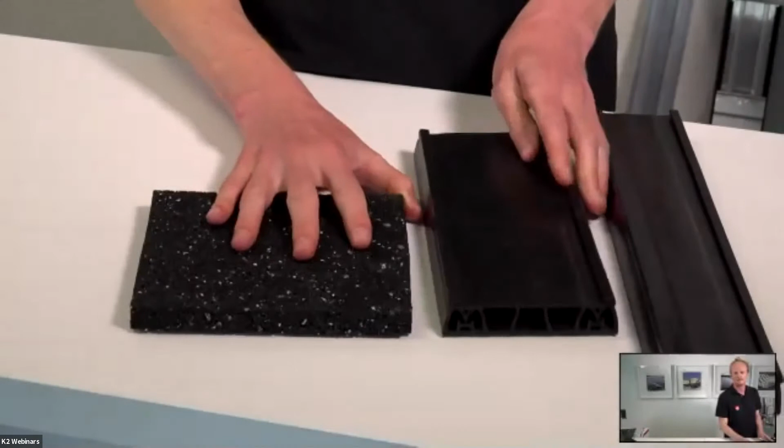And they have different purposes. So first of all, we have the mat for our Dome Classic. And this is a mat that's really just there to protect the roof from the rail. So it's not designed to highlight the friction coefficient between the roof and the mat. It's more there for protection. So this comes with the Classic system, and the Classic system is the earliest system that we have.

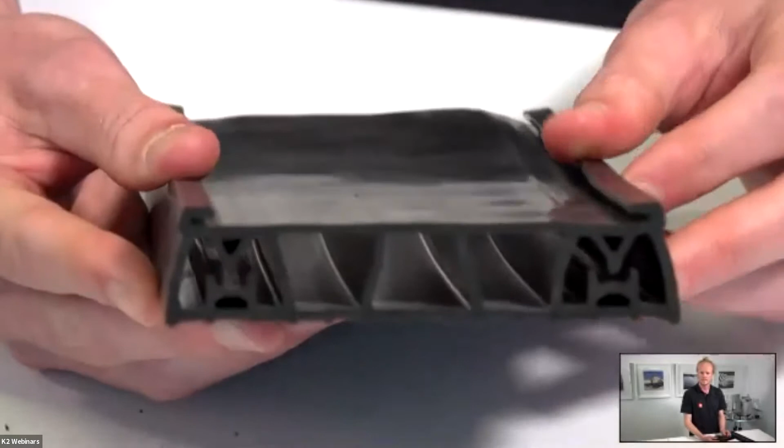Following that, we have what we call the Mat V, and the Mat V goes with the Dome V system. You can see this is a little more designed. It's been made with a honeycomb structure, and the geometry is designed specifically for a little bit of friction coefficient, but also to hold the rails in place. It'll become a bit more clear when we actually have the rails with it as well, what I'm talking about in terms of holding the rails in. Now we have a nice profile here for a bit more extra strength in the geometry. And you can see there's also a lot less material as well.

Moving on, we have the Mat S, and we refer to this as S for the speed rail. And our system, Dome 6, is built with the speed rail, as well as the Dome Classic, but that is just the reason for the naming convention. Similar to the Dome V, it's been designed with a bit more friction coefficient, and it's very firm on the ground.

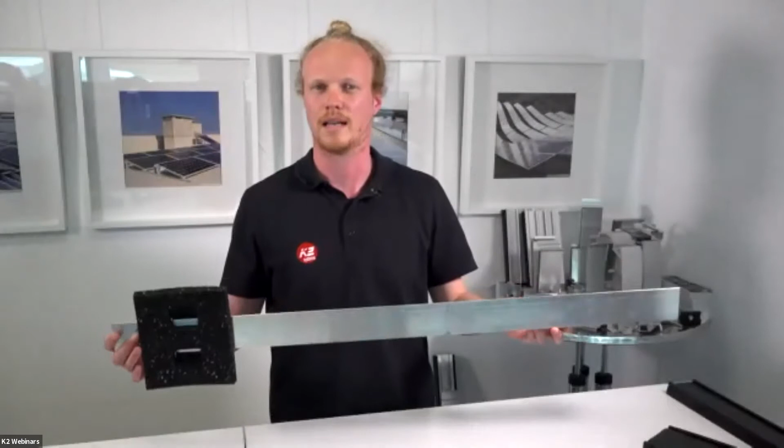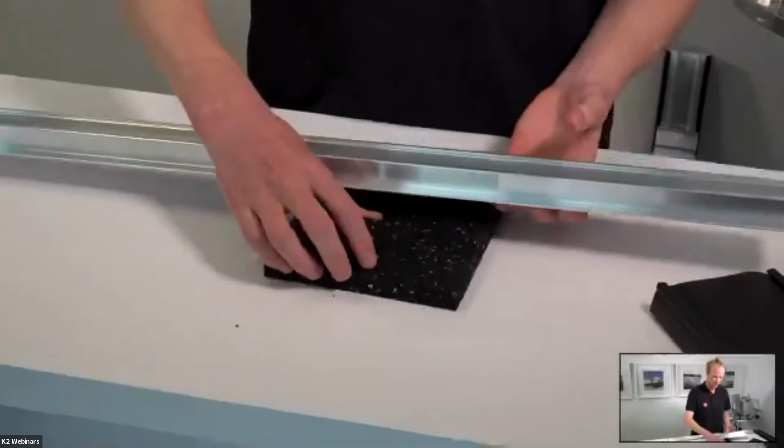Moving on from the mats, we will now go to the rails, just working our way up from that picture before. So the rails we have first up is the speed rail for the Dome Classic. We use the speed rail for other systems as well, for our trapezoidal roof, which we'll be discussing next week, I believe. And this just sits on the roof using the mats. Here's one that's already been pre-installed. And I'll just show you the process now of putting this mat onto this rail. These parts pop up, and it just sits like that.

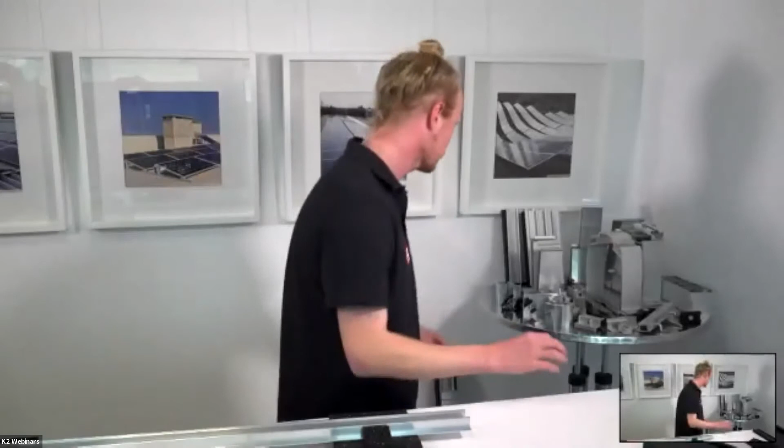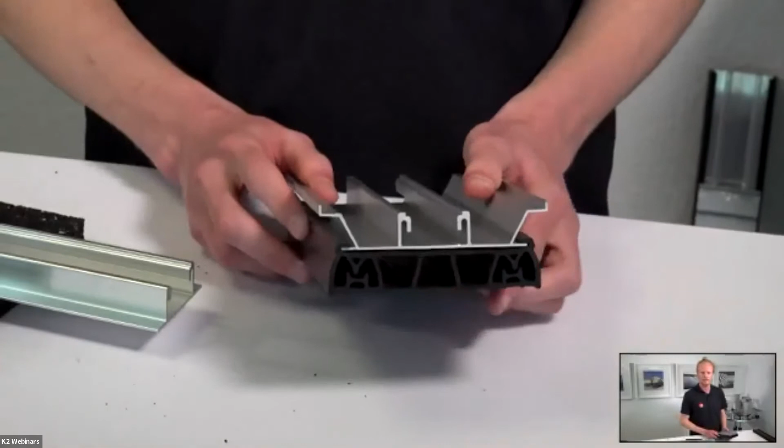You notice the rail itself is very different as well. It's a lot wider than the speed rail. And this allows for a little bit more ballast to be placed on it than the speed rail, but also allows this mat to be shorter. And the surface area is quite large on the mat because the rail is quite large. And the friction between the mat and the ground can then be better than perhaps the speed rail that we saw before.

Kyron, yeah. I do have a good question. I think everyone would be interested in knowing this. Thomas was asking the question, can we mix mats between Dome 6 and Classic system?

Or can we use mats from Dome 6, but in the Classic system? So it is physically possible. The rails are the same. However, at the moment, our base software does not plan for this. And so the advantages of the mat S, which are a higher friction coefficient and then potentially less ballast, are not calculated in our software. And you would then have to install the mat S onto the rails, which is a lot harder process than the classic building protection mats.

It's just longer, and it's a little bit more tedious. The Dome 6 comes pre-assembled, so you don't have to worry about assembling these mats. But if you were to do it yourself, it would be quite time consuming. And the software calculation that we have would not give you the benefit of the design purposes for the mat. So technically, yes, you could use it, but practically you do not gain any advantage from it at the moment. This may be something we do later on, but it's not happening at the moment.

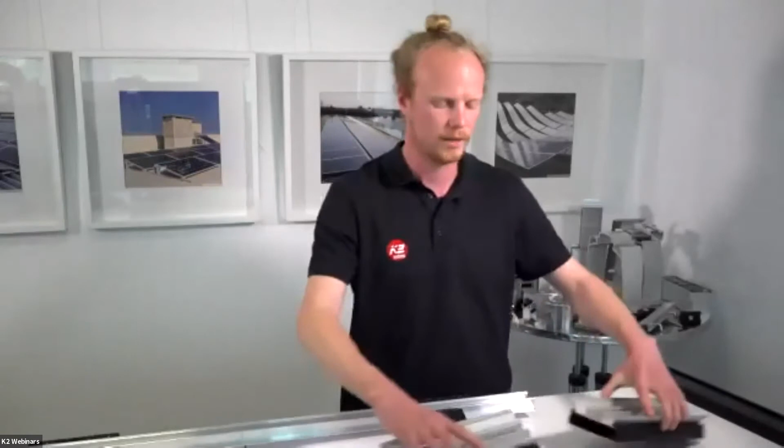So this is made out of aluminium. You can see it's one thick structure. The aluminium is quite thick, and it has two fixation points, one here and one here. And this will just sit on the base rail and then be attached with our K2 slot nuts, which, as I think the majority said they had used before, you were probably aware of. Just before we install it, let's compare that with the Dome V.

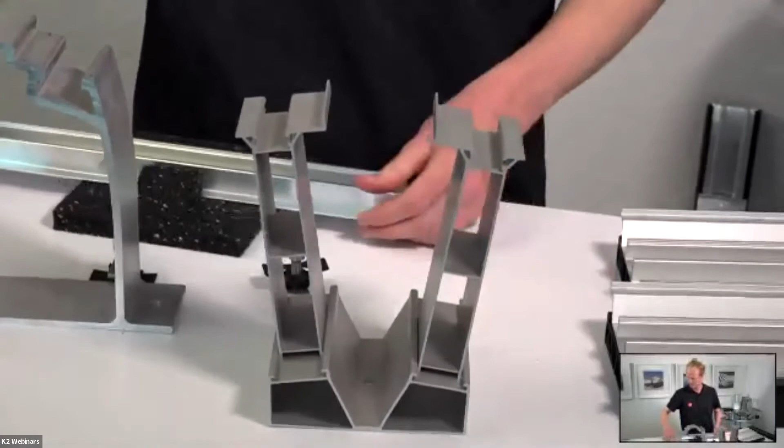The Dome V, I think I forgot to say this before, is named because of this V shape. This is why we call it Dome V. And if you compare it to the D-Dome peak here, you'll see the V is quite obvious. But you'll also notice that there is a reduction of material in this. So the geometry has been utilized a little better. The thickness of the material is much less. And there's only one fixation point, right in the middle. So this will save your installation time a fair bit, which is one of the advantages.

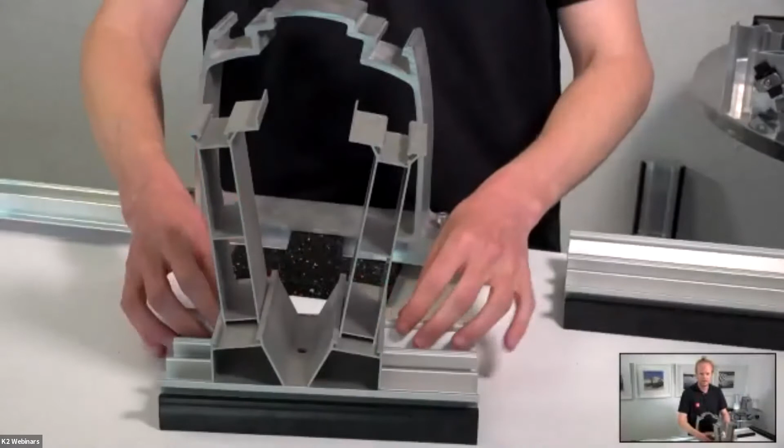We'll just show you now how both of them are installed very quickly. So we have our Classic system from before. It just sits on the rail with the K2 nut. And we just do this on both sides. If we compare this to the V-rail, the process is very similar. We will just sit this on the rail and attach with our K2 slot nut. Here we go from two fixation points to one fixation point, so it can be a little bit quicker. And then you're set up.

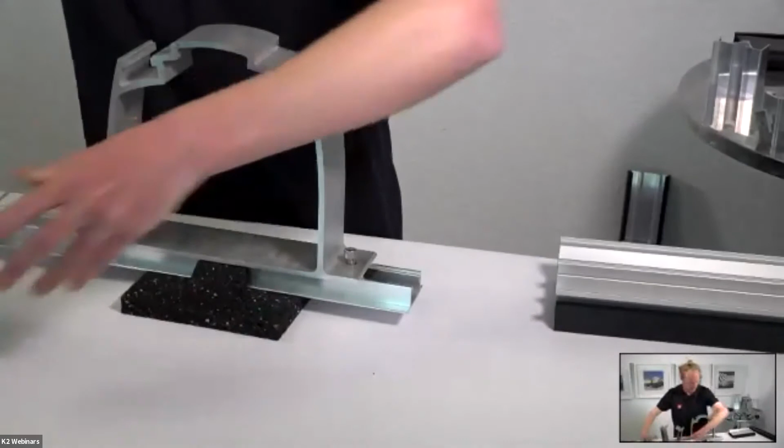So both of these represent the top side of the modules, the high points. We refer to them as peaks. This is a D-Dome peak for the Classic system. This is a D-Dome peak for the V system. At the other end of the modules, we have what we call an SD, and very similar to that installation, the SD for the Classic system is installed also with our K2 slot nut. So for the Classic system, there are three fixation points: one at the SD and two at the peaks.

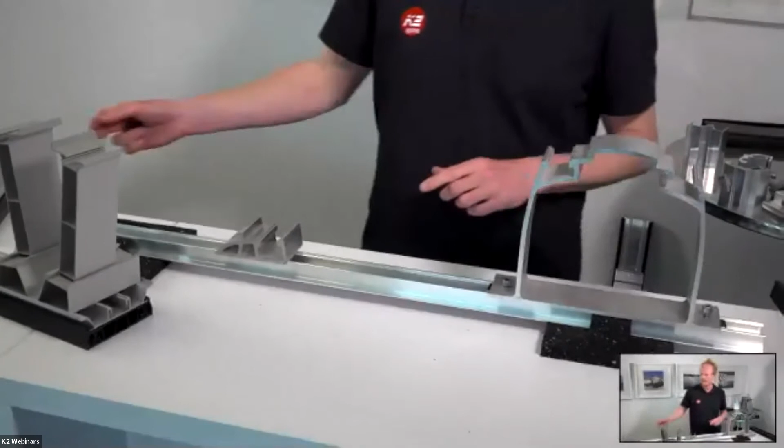And comparing that to the V-rail system, we actually only have one. As we saw before, there is a discontinuous rail, and this is just representing the setup, but we'll have our D-Dome peak here. And then at the other end, the SD, we have no fixation. This actually just sits in the rail, which makes it a lot quicker. It is fixed, and it's fixed through friction effectively. When we put a clamp in, it explains it a little bit better, but it just sits into the rail like so.

Excuse me for the noise there.

And so your module will sit from here to here, and there'll be a gap in the middle. So until now, we have not spoken about the Dome 6. And that is because with the Dome 6, the majority of these components come pre-installed. So we didn't really have to worry about how they fix together or measuring the distances between these, because for each different module, the distances will be a little bit different, and the process of measuring all that out can be quite time consuming.

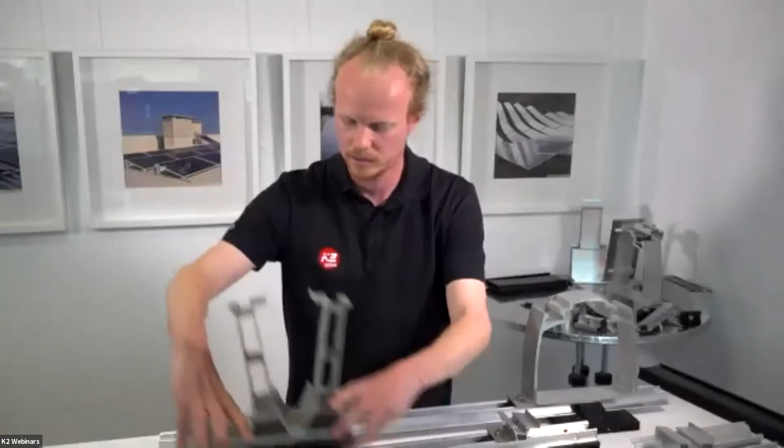So earlier this year, perhaps late last year, we introduced a newer product called Dome 6. It's very similar to the classic system, but everything is brought to a smaller scale. So instead of having a long continuous rail, each rail effectively sits under one dome. And we can see that a little bit in the PowerPoint. So on the bottom here, where it says 140 millimeters, this represents the gap between the two modules, there is actually a rail connector. So one rail sits under one D-dome, and then a second rail sits under a second D-dome.

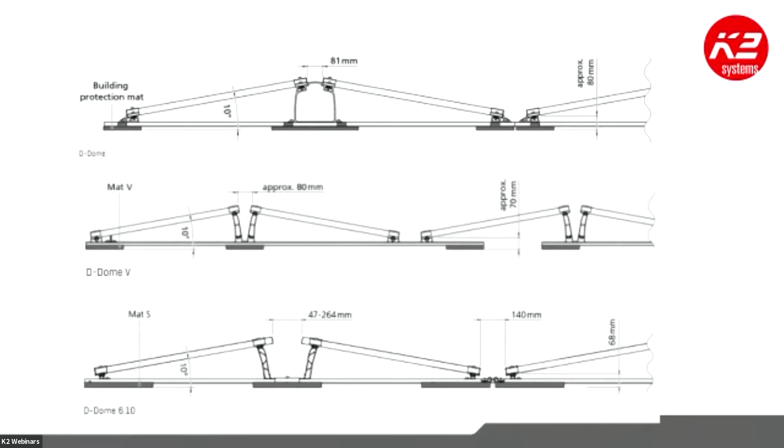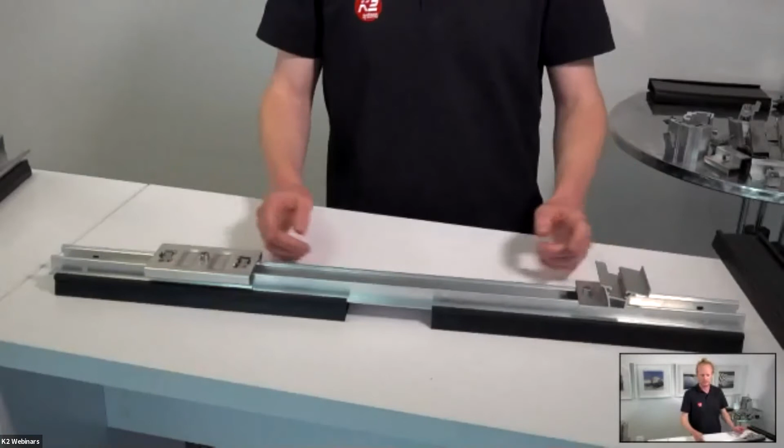And everything underneath the modules either comes pre-installed or can be installed with pretty much a click, and I will show you that right now. So this is a smaller sample for the module. Generally for our D-dome systems, which is what we've been showing here, this would be 2.25 meters, a little bit shorter for the S-dome or the single domes. And these components come pre-installed at the correct distance. So you don't have to worry about measuring this out or tightening them. They're already fixed. And the peaks are suitable for either the S-dome or the D-dome.

And yeah, can you zoom in a bit, please, Klaus?

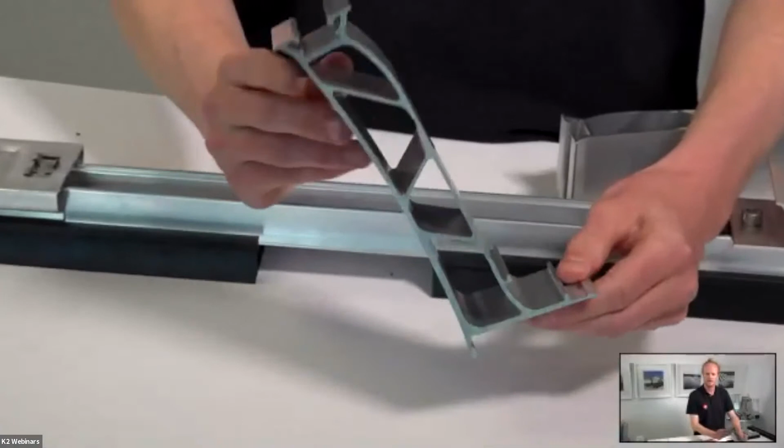And you see, similar to the V system, the geometry has been designed to improve strength. There is less material being used. And it looks a bit fancier, to be honest. And we'll also notice that there is no fixation here at all. So when setting up the Dome 6 for the S-dome or the D-dome, for the peaks and the rails, we actually don't need any tools, which can increase the installation speed up to about 70%, we've found.

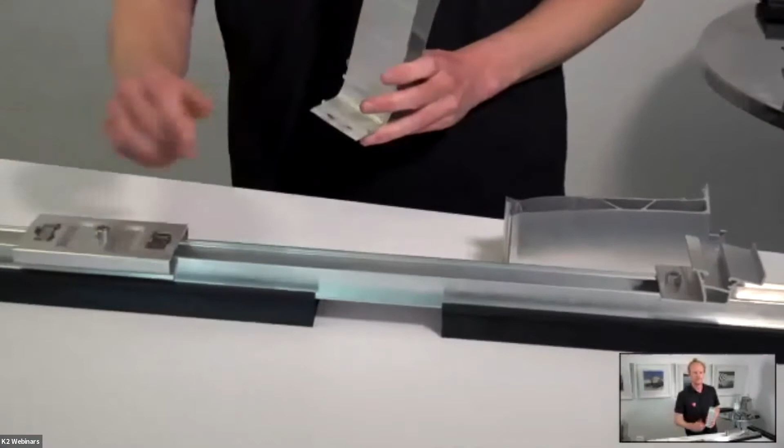Klaus, could you just zoom out a little bit? We'll show the installation now. Yeah, so, no, out, sorry. And the other way. Thanks.

And so here, this is the midpoint for our system, and we simply slide in and we click. And so this is now fixed. And the reason we can fix this position is that the clamping is a little bit different for the Dome 6 than it is for the Dome V and the Dome Classic. It's just a click again. And we'll just jump back to the PowerPoint to show this.

So on the top two pictures, hopefully you'll see the top end of the module is clamped on the corner as well as the bottom. So the distance between the two modules on the top is about 80 millimeters. And this is a fixed value. So the distance between the peaks and the SDs has to be changed for each module. The beauty of the Dome 6 is that at the bottom, the module is clamped on the corner, and on the top, it is clamped somewhere on the edge.

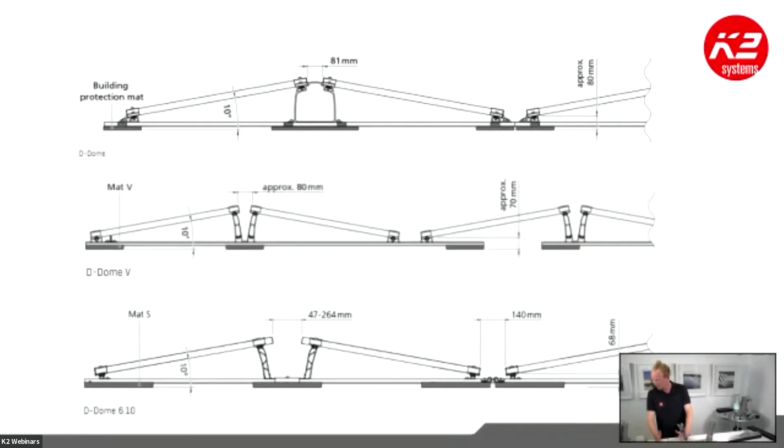So we go through this in a lot more detail in a Dome 6 webinar from earlier this year. That would probably be the best place to discover a bit more information about that. But the advantage is that the Dome 6, as it is pre-installed, is a lot easier and a lot quicker to install your whole system. So working our way up, we've gone from our rails to our SDs and our peaks, and then finally we'll have a look at our clamps.

So Karen, before we have a look at our clamps, we have a question from the audience, from Thomas. He's asking, as everyone knows, sometimes we have to have some anchor points on flat roofs which are higher than 3 degrees and even higher than 5 degrees sometimes.

But so the question is, can we calculate anchor points? He knows the Solomon feet, which we have, but there are many more options, but he's specifically asking for the Solomon. Can we calculate anchor points for the S-Dome V 10 or 15 degrees, but with speed rail system, no rails from S-Dome V or V50?

Okay, there's a few points in there. So V-rail, as you said, we cannot use. We need a continuous rail at the moment, or the Dome 6. So we can use anchor points, however, not with the V-rail. At the moment, our base software, well, hopefully in the next month or so, we should be able to have a bit of planning for these anchor points for both S-Dome and D-Dome.

So clamps. We have two main clamp types for all of our systems really, and they are our mini clamps and our standard clamps. Our mini clamps are our newer products. So our V system and our Dome 6 system use our mini clamps, and I'll just show them to you now. So here we have a mini end clamp. These come in black or silver, and they're suitable for modules between 30 and 50 millimeters in depth, and this will cover the majority of modules on the market. So they simply just slide into this channel, like that. Very, very simple. And then they are tightened from above with an Allen key or a hex key.

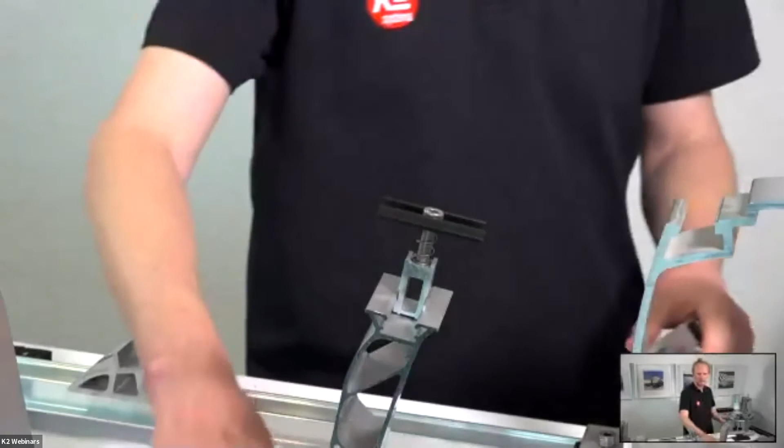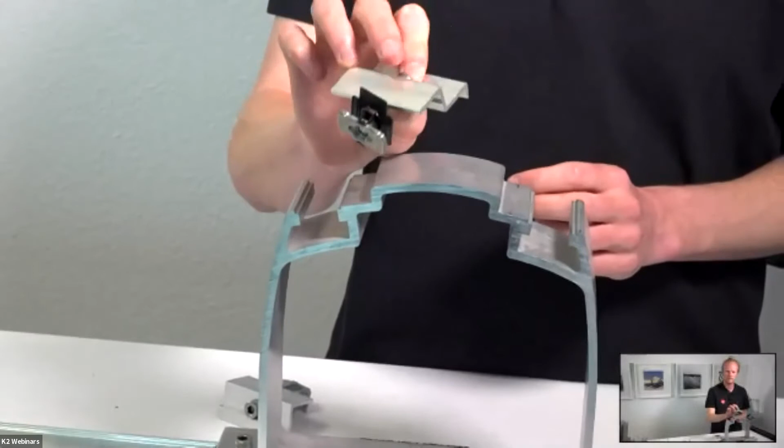Our other channel is the standard channel, and we use this in the Dome Classic system. And you might also know this from our speed rail or solid rail systems. It's a little bit wider, a bit thicker, and we can use that with our standard clamps. So here's a standard clamp, which slides in and then is tightened from above.

But then we also have, so here we have a one end. Sorry, no, we don't, we have a mini clamp. Here we have a one end. And the process for installing this is a little bit different. You just push and click, and then you just tighten from above. So both of these are also available between 30 and 50 millimeters. So for all our flat roof systems, we are able to calculate or hold modules between 30 and 50 millimeters.

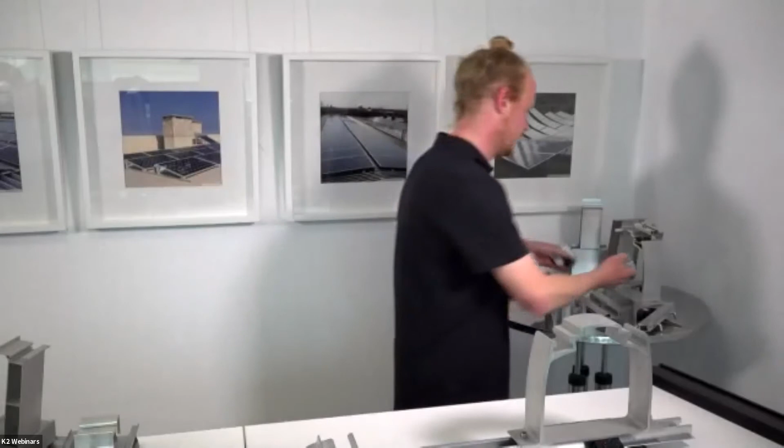So as we said before, all of them also come in single-sided or double-sided. I've shown you all the double-sided of the classic V and Dome 6, but I quickly want to show the S-Dome and just an example of how that works. So here we have an S-Dome classic peak, and here we have some of the clamps we said before.

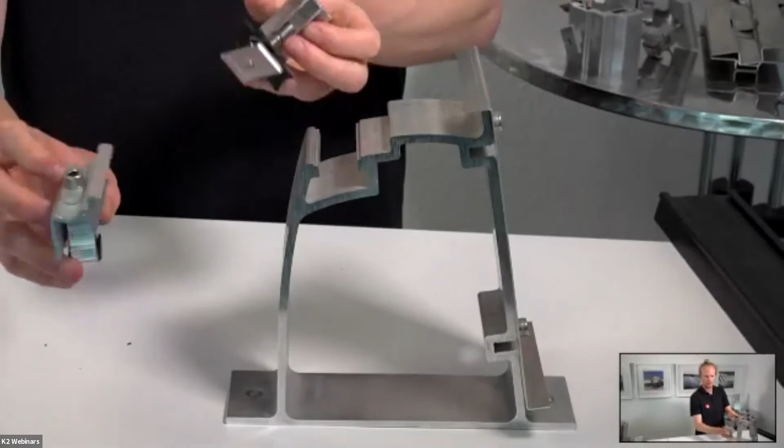Notice, this is also a thicker aluminium, but the important point to note, and this is with all of our systems as well, is we have a windbreaker. So the windbreaker acts as effectively the second dome that is in a D-Dome. The D-Dome doesn't need a windbreaker because it's supported, it's shielded by the other module. Whereas here we need something to ensure the wind doesn't come up underneath the module and blow the module away.

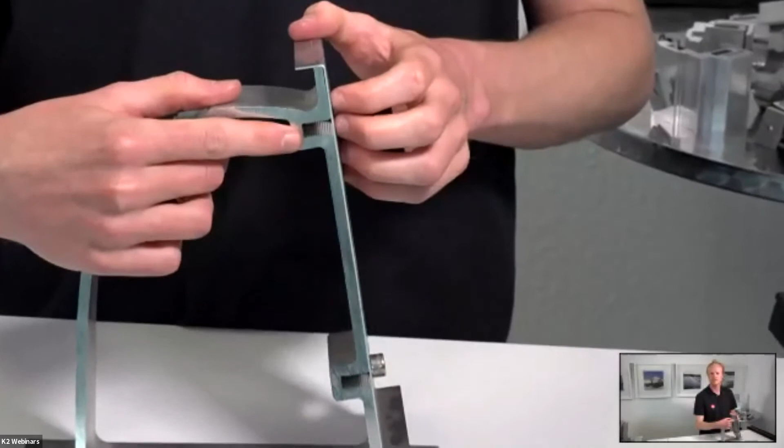So for the Dome Classic, which we have here, the fixation is with a screw. This channel is threaded, so you can just screw it in. And yeah, that's lovely. Thanks, Klaus.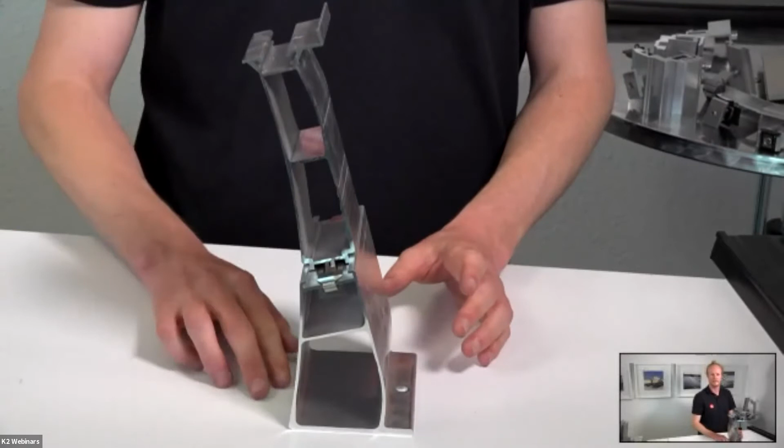And the fixation for some of our other systems is a little bit different. So here we have the S-Dome peak for the V-rail system, and this one is in 15 degrees. At the moment, the V-rail system is the only system that we can provide in 15. As was asked a few minutes ago, the Dome 6 will also come in 15 degrees, but not at the moment.

You'll notice here there are no holes and there is no channel. However, the profile is very similar to the D-Dome V that we saw before. So this fixation is a little bit different: at these points where the lines are, the material is a little bit thinner, and the windbreaker sits on here and is screwed through the material. So just a little bit different process.

In terms of the equipment, I think the only other thing we have is ballasting. Roman will talk a bit more about the importance of ballasting and how we calculate it through our software. Okay, but Karen, if we are talking about the clamps at the moment, I think there is a good question everyone would be interested in as well. Miroslav was asking which of the domes can be used with this quarter clamping. Is there a length limit from which on the clamps must be used, or is it module specific?

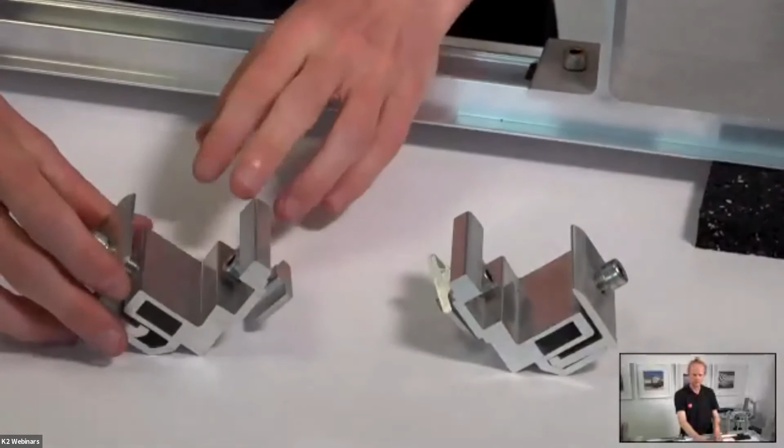So quarter clamping is a term we use for clamping the modules not on the corner, but within the module, about a quarter in. And just for those who do not know what it is, we use a different clamping structure. These sit in our standard channels, so we can only use the quarter clamping with our Dome Classic. So they will sit in here. This is then tightened.

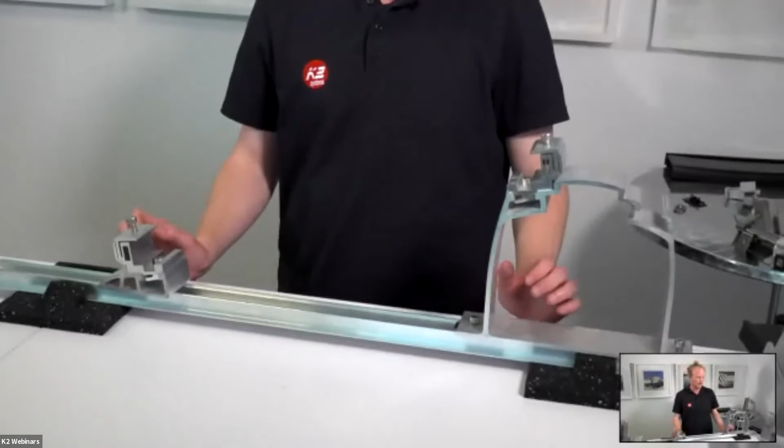I believe at the moment this is plannable in base, only in the D-Dome though. So you're unable to plan this in S-Dome. I believe that will be coming in the future as well, but the calculation is a little bit different. The heights for the modules, I believe, are the same.

Roman, is that correct? It's not quite true. It's from 34 millimeters up. Oh, so from 34 to 50 millimeters. You might get into trouble with 30 millimeter or 32 millimeter modules. Yeah, so please be aware of that. And you can see that is just because of the height in here; there is actually nowhere for it to go, we are unable to go any further.

Exactly. And one more little note: for the S-Dome, the quarter clamping is not available. It's a special construction, a bespoke solution. The main problem is the windbreakers, which have pre-drilled holes on the side. If you prepare the rails and also the peaks more into the center of the module and you want to clamp on the long side, you won't be able to fit the right windbreaker in the right position, and that's why it's a bespoke solution.

So just for you guys to know, as information, we are only able to calculate the D-Dome system in base in our program. And so everyone at home should be able to do that as well. It's just one of the options in the software. Very true. Thanks for that answer. You're welcome.

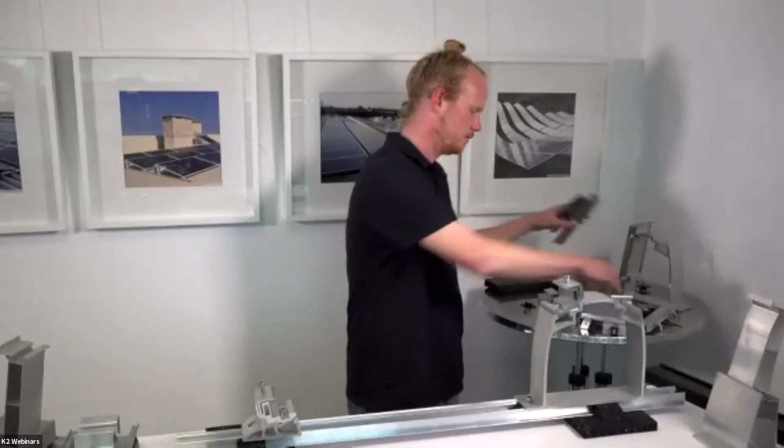Yeah, so while we have this here, we can then just discuss the ballasting. All of the rails are able to withstand a little bit of ballast, but usually we will supplement the rails with what we call a speed porter. The speed porters just sit over the top of the rail. These are the speed porters for the Dome Classic or the Dome 6, because it's just for the speed rail. And here we have one for the Dome V or the V-rail.

And they just sit on top of the rail like so. And then you're able to build up with bricks in here. And so usually this will sit underneath the modules. And as you can see, not very movable, which is good, nice and firm.

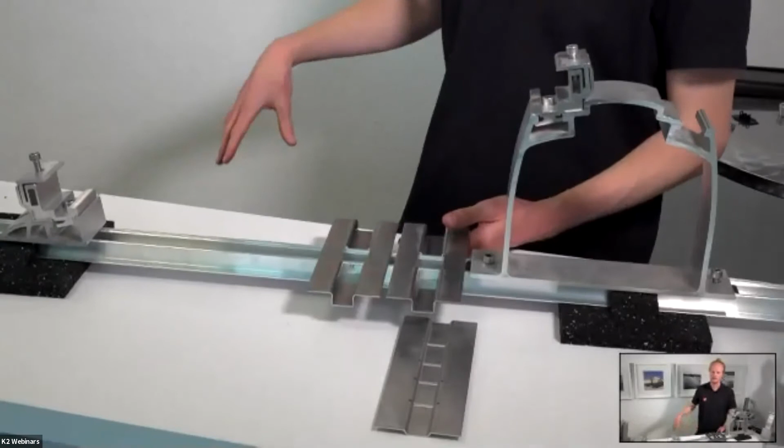Perhaps too firm. We're also able to put a little bit of ballast underneath the D-Dome as well. And for the majority of cases, this should be enough depending on your loads. However, if you have a place with high wind loads or high snow loads, you may need extra ballast. And then we refer to it as a porter, and we connect this rail to a rail which would be over here. And the ballast then sits both underneath the module on the rail, but also between two rails.

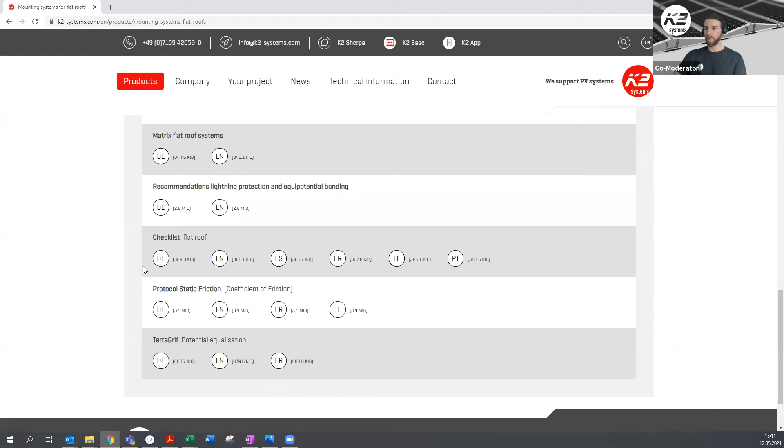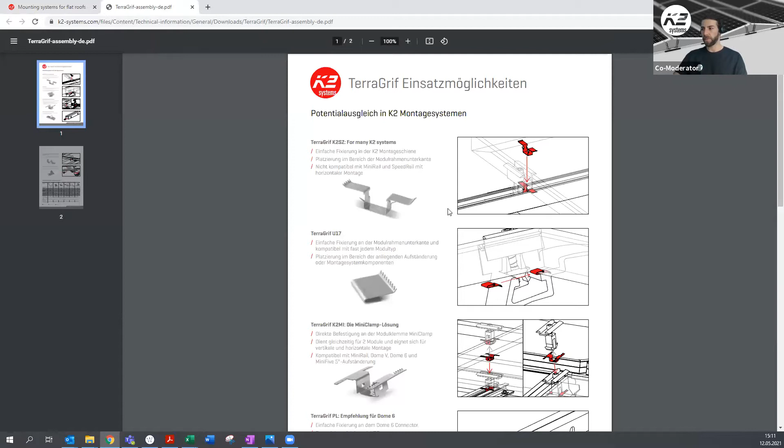Then also the second part, what I wanted to show before we come to the more important friction coefficient part, very quick. As you all know, sometimes there's the requirement of lightning protection. So we have different clips, which are called TerraGrif, which you fit in between the module, the rail, and the module clamp. And this is how you get to know which clamp you need for which system, and also how to prepare and fix it. And there's a little table where you actually see very easily which clamp do I need for which system of K2 Systems.

So, and now we want to continue for the technical information. And then you go for the overview. And very important, Kyron mentioned it already, about the friction coefficient. We go onto the flat roof, and then also, where are the, sorry, the product information, not the overview. And we are on the flat roof systems, and find on the browser, where's the download button? I'm sorry for this.

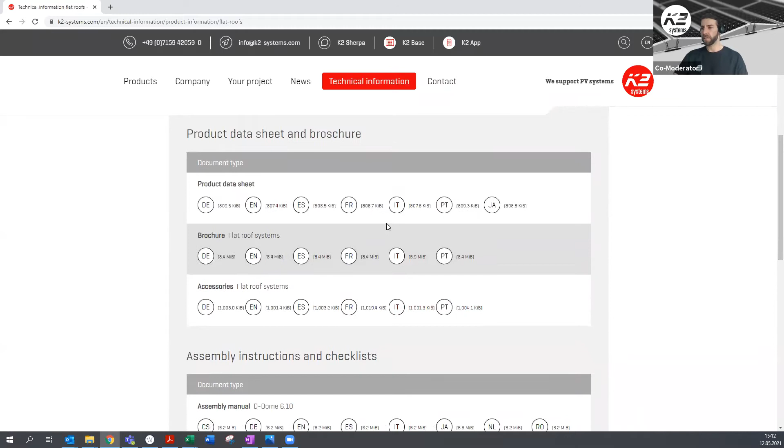If you just click on D-Dome 6, for example, no, sorry for this. Very sorry. I think we are still here on the products and flat roof. This is where we can find it. If you click on one of the systems and we try to find the downloads, this is where we find for the accessories the brochure and the product data sheet. There's the assembly manual as well, and the checklist.

And also I will continue to show later on the other part, which I was just talking about. But better if we continue right now with Base, and while the questions come up, I will show directly on the website. I think that's the easier way. So if we want to start planning our project, we go onto K2 Base. There's a direct link on our website where you have demo videos and register now, where you can just start K2 Base directly. So I did sign in already.

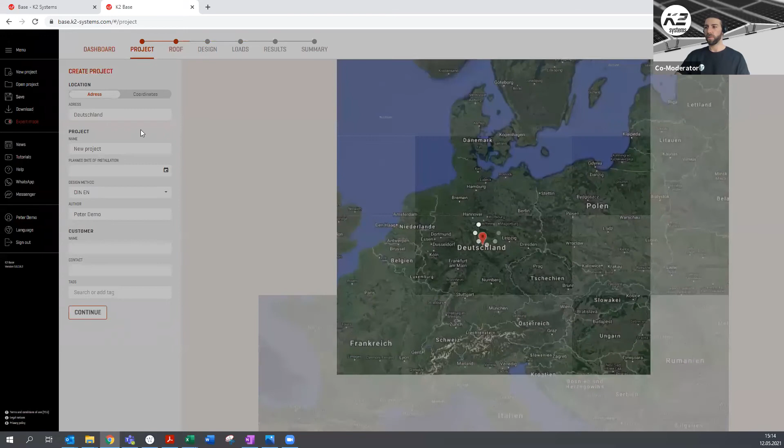For those of you who haven't signed in yet, it's very simple. You will get a confirmation email, and then you can just start planning. This is a demo account we opened up for webinars. So the language will be changed to English now for you guys to understand everything I'm doing, and for me also very easy to explain. So we will start with a new project, and we will do the planning on our headquarters like last week.

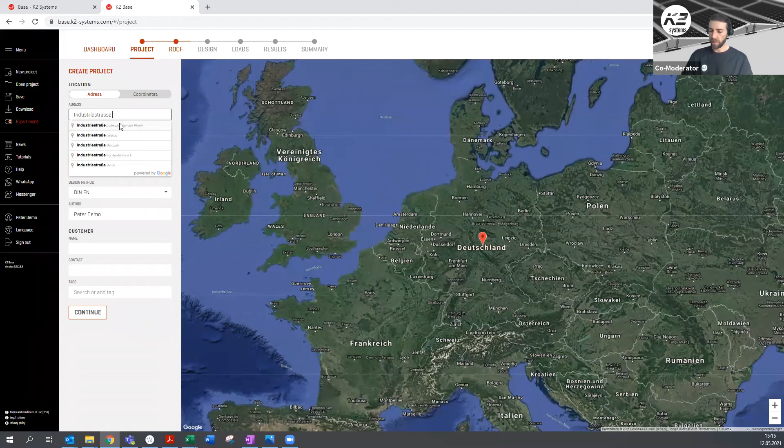It's Industriestraße 18 Renningen. This is where our headquarters is, and here you see a picture just like in some maps, for example Google Maps. Here we are able to type in some information about the project. For example, the project name, we just call it Webinar Flat Roof. And then you're able to change the name of the author, which would be me, and then the customer and also the contact of the customer.

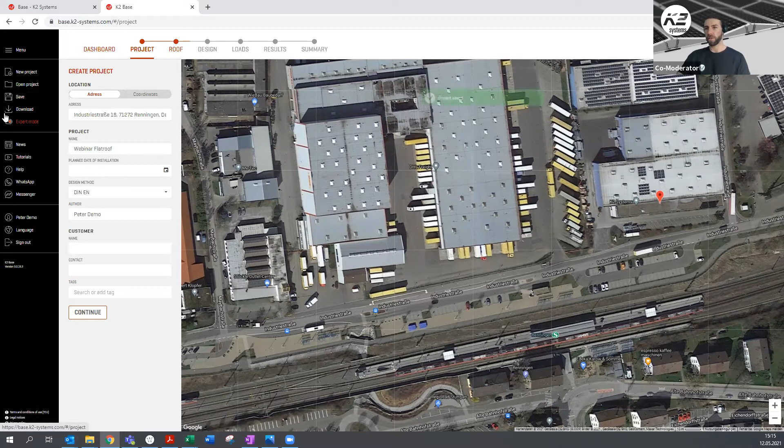So today we are planning one of the flat roofs around here. I think this one would be very nice, not too big and easy to show you something. So next step, first of all, we save, which is on the left-hand side. So we save the project and continue to draw the roof. Next step would be clicking onto the roof button here and finding our roof in the little red square. We are able to zoom in and out just by rolling the mouse, and also move left and right. Most important is that the roof you want to draw is in the red square.

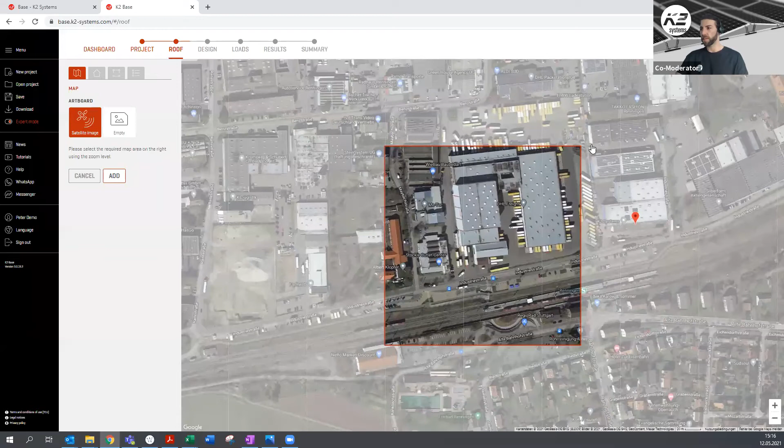If the roof is not available yet, if the building is not there, you're always able to draw on an empty paper. Right now, we want to pretend to build a PV system on this roof. So we have this in the center of the red square and press the add button. Today we're doing the flat roof, and it's rectangular and even. It doesn't matter if it's gravel or a green roof, membrane or bitumen. It's always this button because it's always even. That's what a flat roof is.

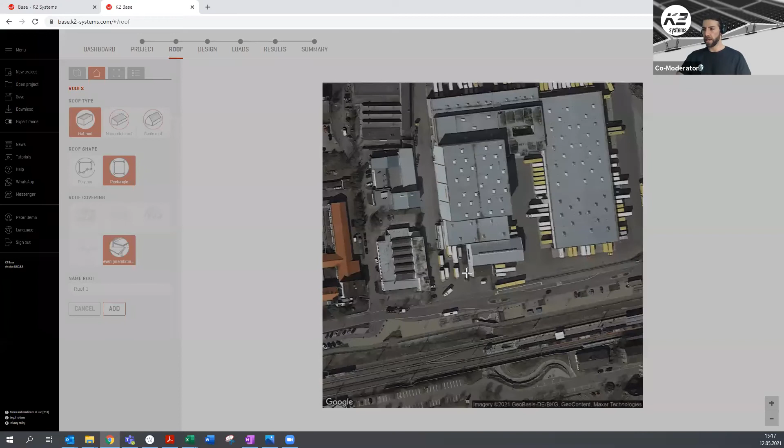And now we see the cursor change to a little cross. We're going onto one of the corners of the roof. One click with the mouse, you see a red line coming up. We're following the roof. Second click, and it changes to a green square, which we are able to move up and down. A third click enables us to see the whole roof we were drawing. Then you have more information about the roof to type in, which is very much needed at this point because it changes the ballast values if you have different roof heights. For example, a very high roof with 25 or 30 meters needs a lot more ballast than a roof with 8 meters.

And also, obviously, which we're coming up for the loads. But for now, we just type in, for example, 12-meter high roof. And let's say the roof pitch is just 1 degree. And we have, for example, bitumen. We're able to choose here one of the different roof layers. So we use a bitumen now.

The parapet wall, you need to have this information from the customer, or at least you need to type something in, which is sometimes an assumed value if you don't get it from your customer, but you need to have a value in here. And now we're coming back to the friction coefficient. And for those of you who don't know what it exactly is, you're always able to press this little question mark. There you can see how to actually measure the friction coefficient.

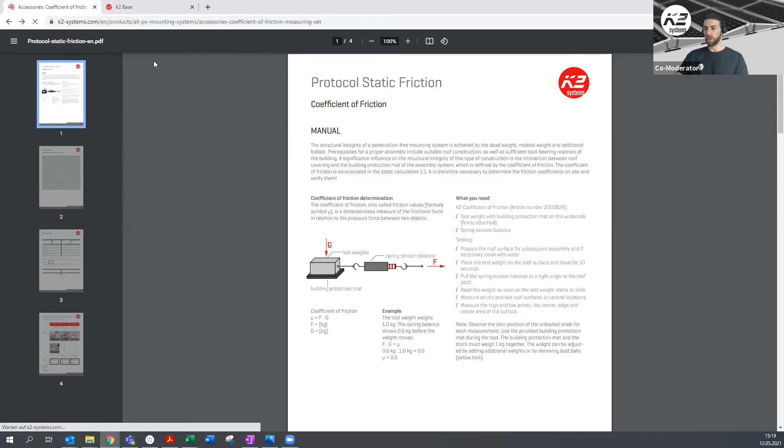Or what I was going to show you before on our website: if you just type in on the search button, friction coefficient, you will be able to find a PDF file and also a video on YouTube. We are able to see, for example, accessories. If you click on here, we're here to learn more about how to measure the friction coefficient. I'm not going to click on it now, but this is what I was going to show you before. We have a little video, and also we have the how to test it. For example, there's a little protocol, a little PDF file to download. I'm not going to go deeper into this, but this is very important just for you to know.

For now, with the bitumen roof, we are choosing the 0.6, for example. And then we have already typed in all the needed information for this roof. What we also could do is switch into the 2D view. And with this little ruler here, we can type in the direct measurements of the roof. Let's say it's 50 meters long and 18.5 meters wide. And we already finished with drawing our roof. Next step, obviously, saving again.

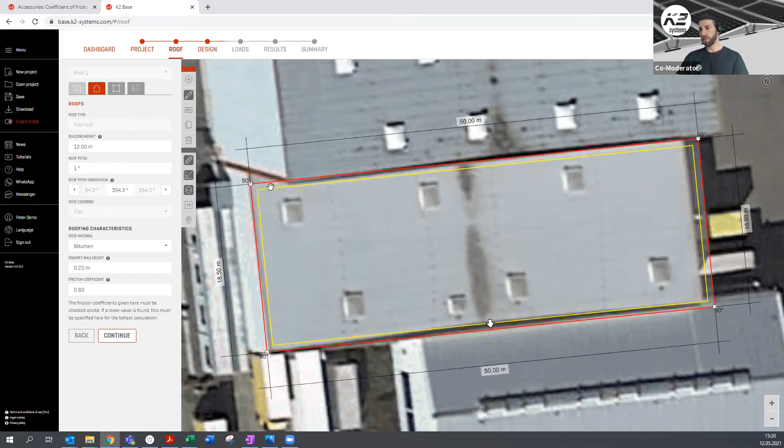And then we continue. Roman, which do you prefer, the 2D view or the satellite view? Well, I do prefer at the beginning the satellite view, because if you have obstructions on the roof, just some obstacles like chimneys or windows or whatever, you see them on the map already here, as I just changed now to satellite view. But then if you want to type in exact measurements, you need to have the 2D view. This is only possible to click on this value while you're on the 2D view and not on the satellite view.

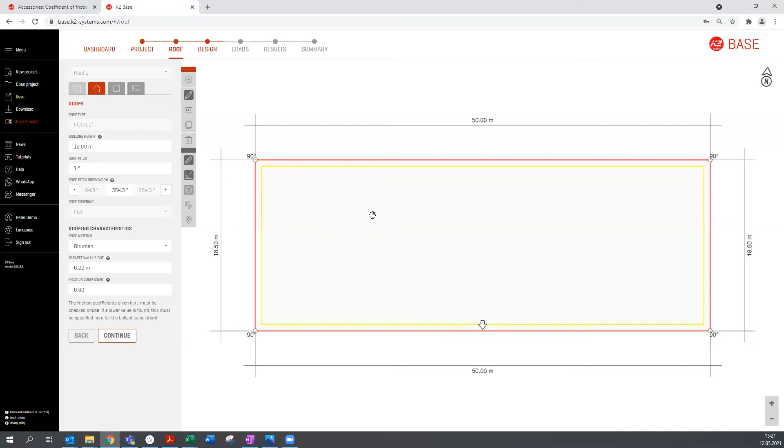Oh yeah, so maybe 2D view would be better for new buildings perhaps that you just have the designs for. Exactly. And also for the planning, you're getting less distracted by the other buildings around. You just have one white paper with your roof on it, makes it a bit easier for the eyes as well.

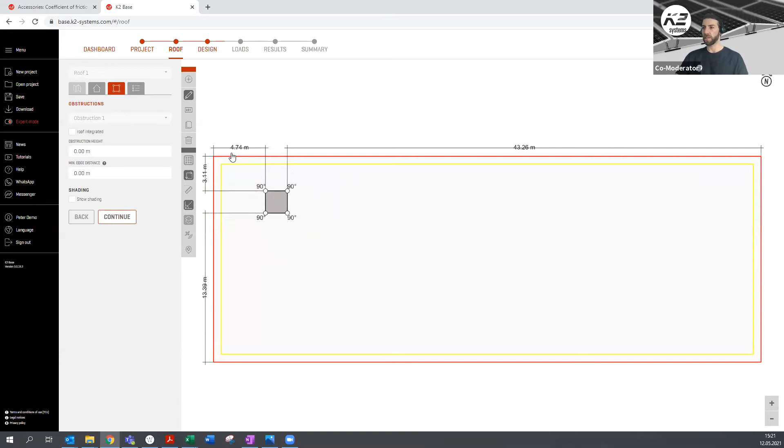And also another thing, if we have obstructions, like we do now here, we can draw them, and we are not only able to add and draw the roof on a certain size, but also the obstruction. So if we're on the 2D view, we're able to set the exact size. Let's say the chimney is 2 meters wide and 2 meters long. So we have a little square, and then we're even able to position it on the right point. So for example, we have it 4 meters from the west side and 3 meters from the north. So now with a 2D view, we are able to put it directly on the right position, if you have it in your plan. Otherwise, you're able to draw the obstruction in the satellite view as well.

Any more questions to this, Karen? No, not at the moment. But thanks for the answer and the thoughts.

Okay. So we did draw the obstruction. If we continue now, we are able to write some remarks. And as I said before, sometimes we don't have values. So for example, we write down the parapet wall height is assumed, or something like this. Just any note, any remarks on this project.

So next step would be designing our module arrays, designing our module fields, and also choosing which module we want. This is the first step here. We have a database with a lot of different manufacturers of modules, and the first top ones are the ones you're using quite often. For now, we're using just a Trina 365, for example. It's right now a basic module with a regular length, not the smallest, but this is what the sizes are right now, just for you to show.

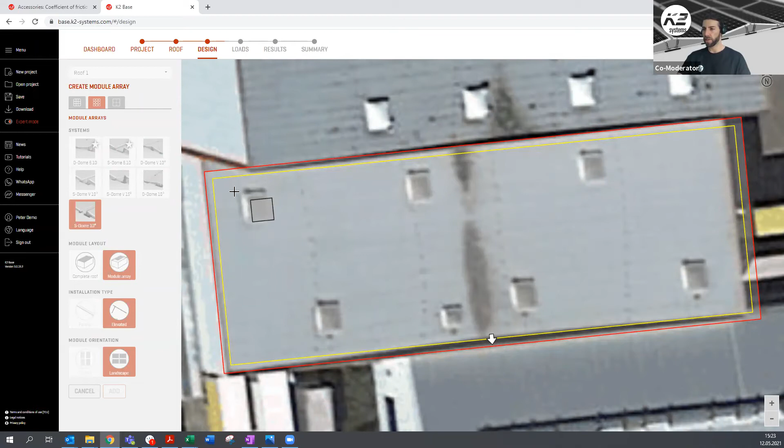So next step would be module arrays. We are choosing which system we want to use. And for now, we're going with the classic system, the regular classic system, and draw one of the module arrays. That's why I'm still in the satellite view. We see here's the obstruction. Here's a big field where it's free. So we can just draw the module array over the obstruction, and it will still plan no modules because there is the obstruction and you won't be able to build modules here. So the tool is actually smart enough to realize, okay, we need to leave these modules out.

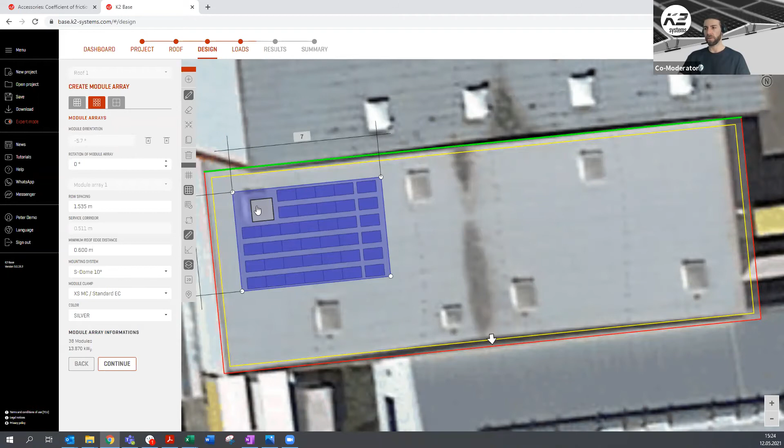But then, as I said before, I prefer the 2D view. So no buildings around which are restricting you. It's just very easy and simple. So you see just the modules. We are able to plan the S dome right now. Actually, I wanted to have the D dome. So even if we did plan the S dome already, we're able to change the system, just swap it here in the field of mounting system. And then we're able to even move it left and right on the roof, wherever you want it to.

I think this is clear so far. We're not having many beginners in this webinar. If it's not very clear, you're always able to look something up in our tutorials, which you can find right here as well. There are many short clips and videos how to use base, and they won't take long. It's just 2 or 3 minute clips, but they can help a lot.

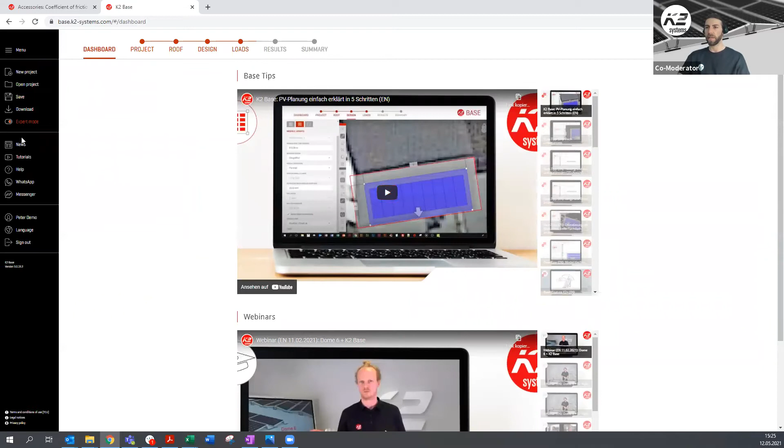So back to the planning. Let's say we set everything up here. Continue on, I'll just make this a bit bigger. We have 7 modules, double modules in a row. So it's 14 modules here. But with the classic system, you see, we need to have a thermal gap here. So we are only able to plan 5 double modules next to each other. And obviously, the bigger the field is, the more modules we have, the lower the ballast is. So what we would do in this case, we would change the thermal gap into the middle. So we have two same size module blocks, if possible, of course. Also, the horizontal one, we are able to change here or type something in.

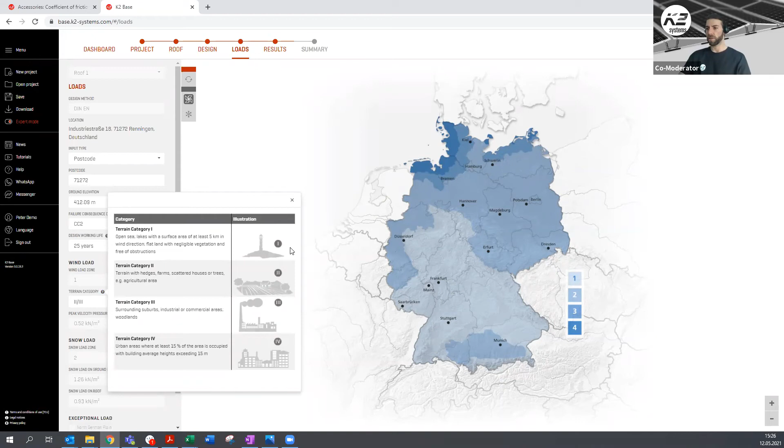So next step is filling in the loads and the terrain category. As we have typed in the exact address, K2 base has a lot of information already, like the ground elevation, and also the wind load and the snow load zones. The only thing you have to type in and change is the terrain category, because obviously we don't know if we are in the surrounding suburbs or right in the city center, or if you're on the coast. That's what base doesn't know until now. Maybe there's something else coming up. But now we are in terrain category 3. So I changed this. And as you see, the peak velocity has changed from, I think, 0.52 exactly to 0.49. So a bit less wind. And that helps us to reduce the ballast a little bit.

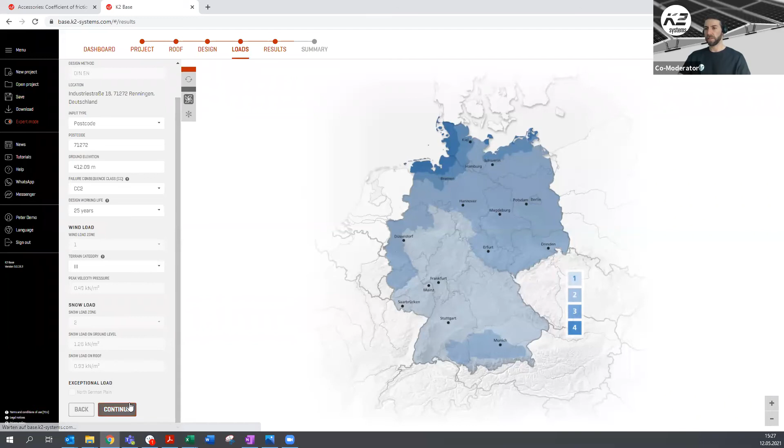Next step would be choosing the building protection mat. As we have the classic system, we have 2 different building protection mats. The aluminum one is for the foil roof and for the single ply foil, and then for bitumen and, for example, gravel roof or green roof, you choose just the regular one, which we're doing now. And then the calculation is done. That's pretty much all you need to do.

What else you could do is, if you don't know how much the loads are, or the force pushing onto the modules, you're always able to click on the module, and the next window is going to open with the results, and there you can see the loads on the module. And also another little trick is if you click directly on a rail, you're able to see the rail length, and therefore you can just choose the right rail length you want to use for your system. Of course, right now the 5.5 meter is the best, but then maybe you choose the 4.4 as well, or the 3.3.

So these are little options you have. And yeah, that's, I think, pretty much all for the first planning. We were talking about the quarter clamping. I'm going to show this really quick. We have the system type here to choose, and also the mounting option. We are still on corner clamping, but we are able to choose the quarter clamping as well.

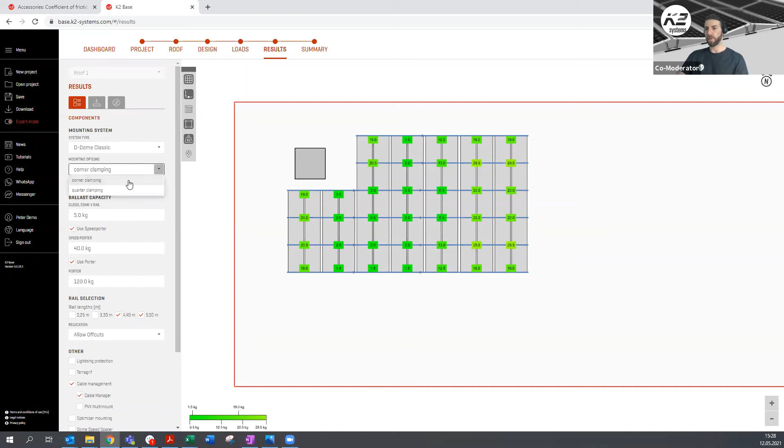And you see the rails just move inwards into the quarter position of the modules. So this is an option we have for areas with very high snow loads, or very large modules, which are coming up very soon. Now I'm changing back to corner clamping and show the difference between the ballast values.

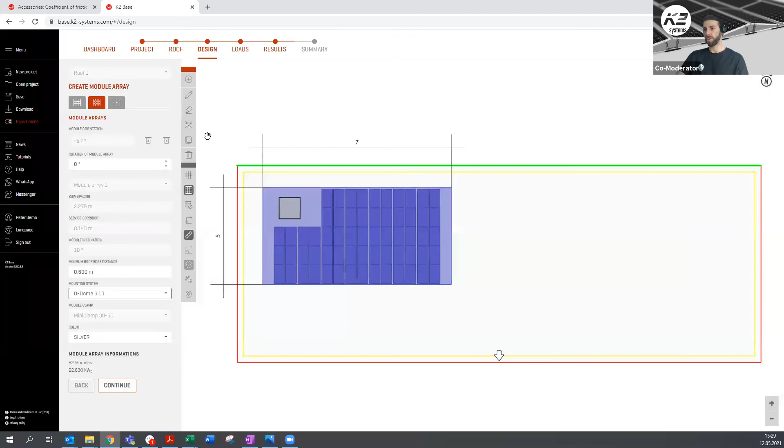You see it's not very high at the moment, but if we change, first of all, we have only 5 next to each other, and then we need a thermal gap. And if we change to the D-dome 6.10, that's 1 more row. So we get bigger module blocks, and therefore we have less ballast. And this is incredible. As you see, there's no ballast needed in the center area, only on the outside corner and field area, the outside area.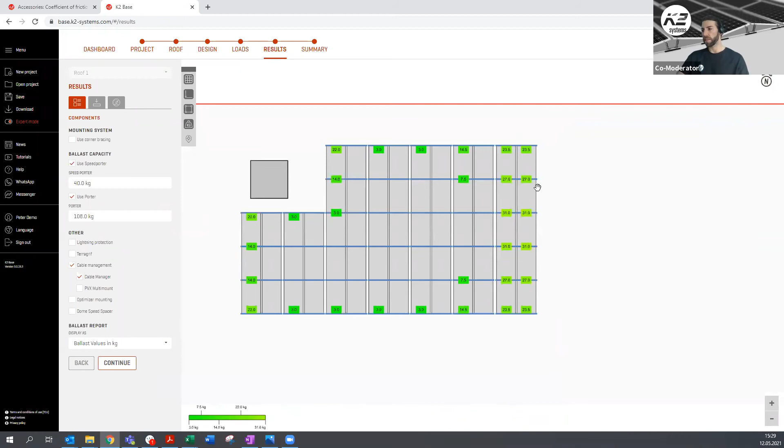This one, of course, there's a thermal gap here now. That's why this is a single one, and that needs a lot of ballast. So you would actually choose to have the thermal gap not here. You would move it more inwards, but as an example, it's good right now to see. And then, yeah, the most ballast is on the corner area.

See 22 kilograms here, 22 kilograms in here, and 14 here. But 3 kilograms here, somewhere around here, and 7.5, and nothing in the center point. So you see there is a big difference between the different systems you're using. That's why it's always good to compare as well.

At the end, one more thing. Here in the summary, this is what you see, the bill of materials, the different roofs. You can obviously draw more than one roof. And then you have also the amount of modules for each roof, which module you're using, all this information, which you get also in the PDF file, the report, which you can generate here. I will do this just now to show you how it looks with all the information you were typing in before.

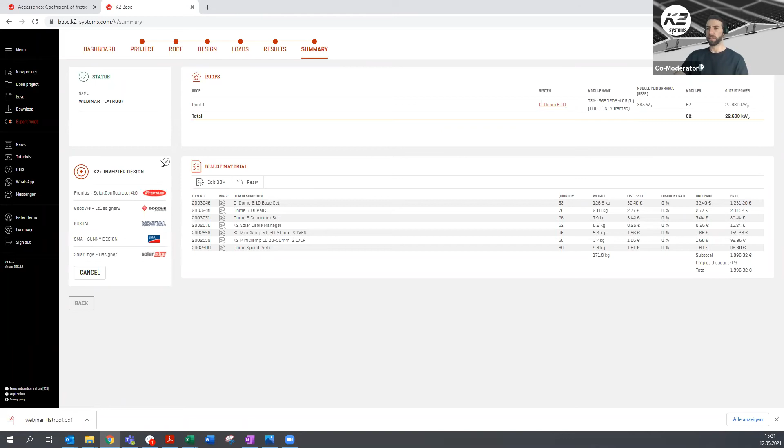And before we open this, you're able to download also the bill of materials as an Excel file, the ballast plan, or if you want to plan the inverter, you can go to K2 Plus and move forward to one of the different inverter manufacturers, just for the planning. Very easy. One last thing before we open this PDF file. Oh, let's do this first. Let's just open the PDF file, have a look through.

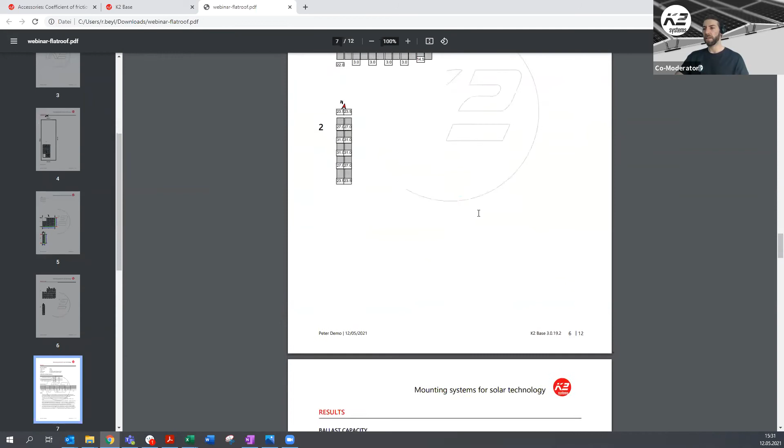You see all the information you were writing in, the project name, the author, the date when it was planned, and then all the project data. And you have a nice little report all in one PDF file. You have the layout, the different rail lengths. You see the ballast plan. It's all in one PDF.

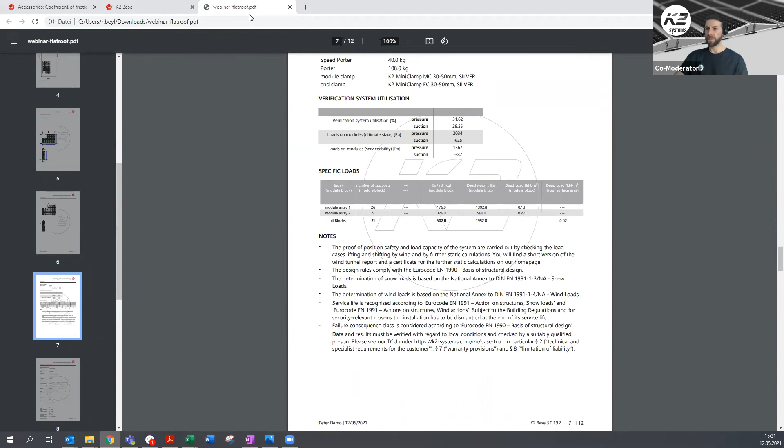So one last thing, if you have any questions regarding base and you want to ask us or our partners, you need to download the base file, because this is your own account. We are not able to look into your account, so we are not able to see your planning. So what you've got to do is download the base file and send it to either us or our partner.

Okay, I think this is for now what I wanted to show you. Karen, are there any more questions for now?

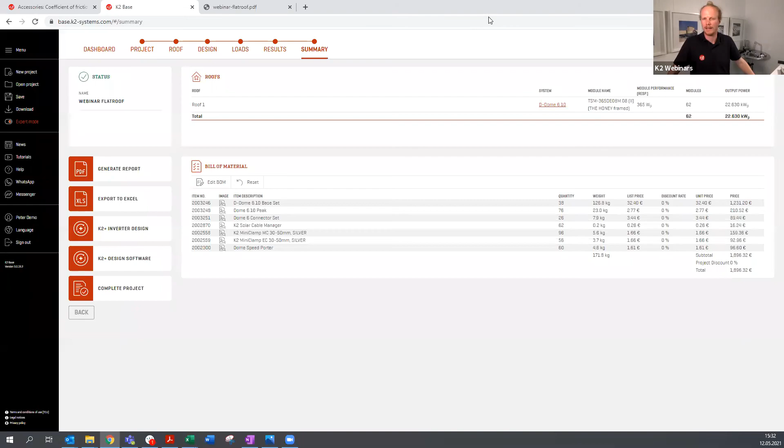There's one, not necessarily about base, but I think a good question, and it is regarding the ballast. So we provide a base report and also the option of a ballast plan. So this information is just for the customer. And someone has asked, do we provide the ballast as well? It's not really something you need to answer, but I thought we could bring it up and say that the ballast is not provided by us.

It's a lot cheaper generally to get ballast locally. So there is no point us shipping bricks everywhere when bricks are usually available in most towns. So in terms of the ballast question, we provide all the material to hold the ballast, but the weight itself must be provided by someone else.

Exactly. So I would say we just start a little Q&A round. Oh, before that, Roman, just a few things that I didn't show before that you mentioned was the TerraGrif, which I thought would be really easy to show because it's quite practical.

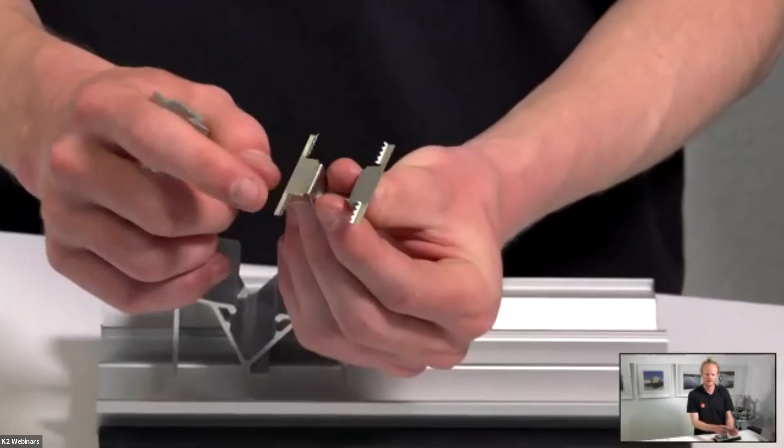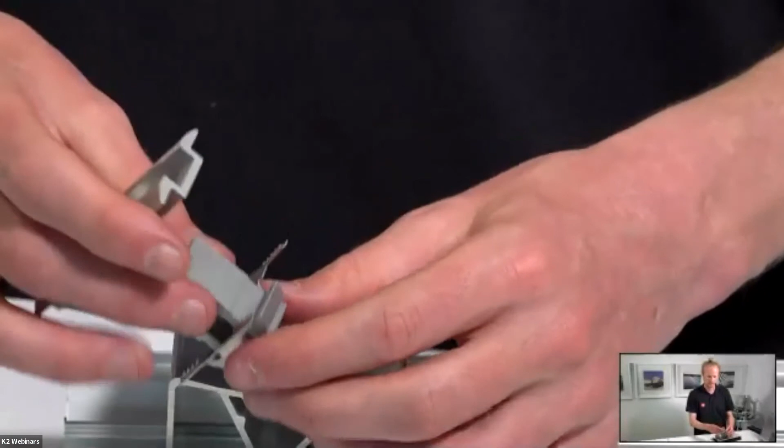So it's just a little piece of metal, effectively, with some teeth on the end, and these dig into the module frame without damaging it, but provide an electrical connection. So for part of the bonding or equipotential bonding, these are very important to ensure that if you have a lightning strike or a power surge, the current's not going through the solar panels, it's going through the outside of the frame into the rail, and then hopefully into an earthing system that is connected to the PV rail.

So that was just a quick little thing. And then there were two other points that we didn't discuss: we are able to install this with fall protection, and we integrate that with a company called Innotech. So this is not plannable in base, but it is something we can provide. And we are also able to put this on what we would call a floating structure above steel girders. We discussed the high snow loads with quarter clamping and the roofs with the Dome Fix Pro set, but I just wanted to bring these other points up as well.

Karen, we have one more question. Very good one. Are there accessories to use pebbles or gravel as ballast? Yes, there are. So we use a similar setup. We generally use our classic system with some PE plates. Roman, there's a little bit of information online, so maybe we could go through this while discussing it. Okay. Do you want me to show the screen? Yeah, I think that would be good. Okay, I will just show my screen.

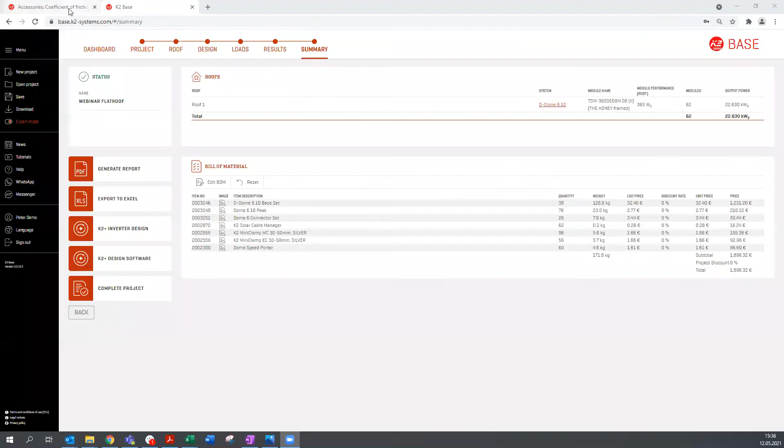And we are moving back to our website. I think the easiest way to show is if we're moving straight to our price list, because this is where we can find the PE plate. Very sorry, just the overview, the general information. I think this is where you can find it. No, not right now. In the products manual, I think, Roman. General catalog. There's a general catalog at the back, at the last point. Oh yeah, there it is. That's what I was looking for before. Okay, there's the catalog.

And if we open this one and scroll to the accessories, we can click to go forward quite fast. First of all, these are the TerraGrif, which Karen was just showing live. And then there's also the PE plate right here. You see it's made just like a trapezoidal sheet, and you just screw it directly onto the rail, and you use this for gravel on top, and then you have the ballasting done.

Yeah, and so we can use this instead of extra ballast. Often roofs will have pebbles or gravel on top anyway. So the existing gravel can be pushed away, this PE plate laid down, and then the gravel put back on top. Depending on the density of the gravel, you may not need any extra ballast at all, but that just depends on the project. Exactly.

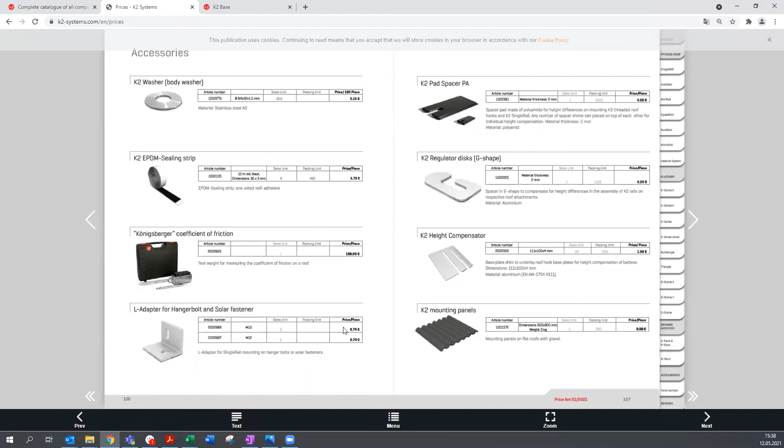And while we're already on this page, we were talking about the friction coefficient before. We are providing the tool for this, right here. You can also find it in the price list, the catalog, just for you to know. Okay. So what are other questions? Just let me look now.

I have one of the questions: can we enter the weight limit of the roof during the ballast planning? I mean, a limit in kilograms per square meter. And the answer to that is no. So we're not really providing a system that is designed for a roof. We're designing a system that will not leave the roof.

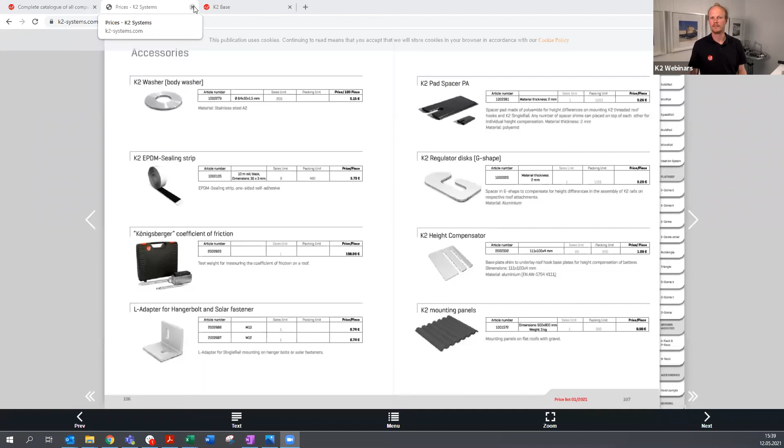So the values we put in are, it may not be possible to achieve this minimum of, in the example, I think we had 30 kilograms per square meter. And so if the project has some higher wind loads or is 3 degrees with maybe not much friction, then it will require this ballast. And then there we have ways of reducing the ballast if necessary through the dome fix pro set. This is not plannable too much in base. There's a little bit that will be coming up soon. But in theory, we're not looking at the building structure. We're looking at ensuring the PV system does not leave the roof.

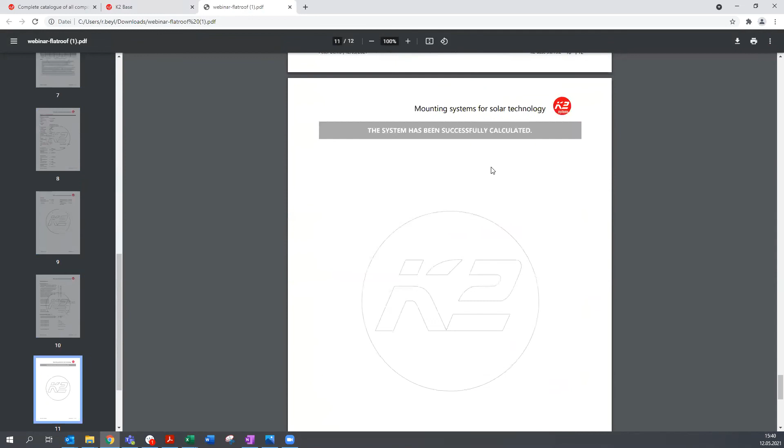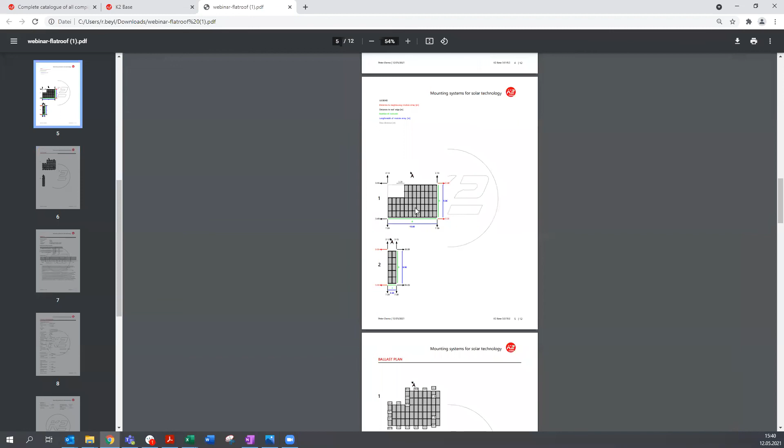So you can see the first array was bigger, as you remember. We have only 13 kilograms per square meter. And then the second one, including the ballast, is 27 kilograms per square meter. And this is only because we have one very large array and one very small one. So if you would split this up into 2 blocks of the same size, then this one would be changing as well. Yeah.